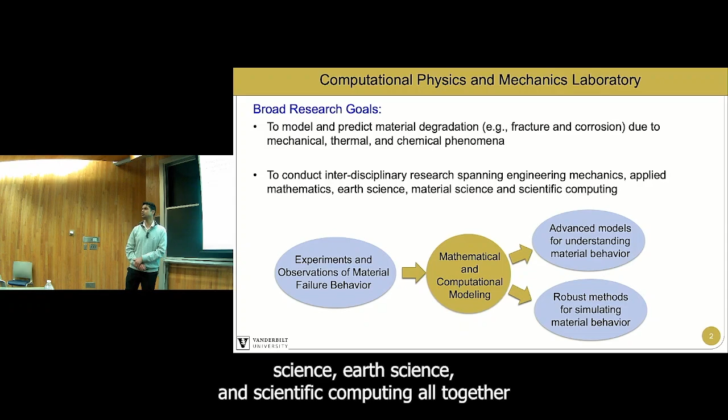Corrosion slowly became an interest in electrochemistry and electrochemical processes, which we are expanding into. It involves mechanical, thermal, and chemical phenomena, and we have to model all these together in a unified manner. That brings in interdisciplinary aspects: engineering mechanics, applied mathematics, material science, earth science, and scientific computing all together. We mainly operate in this mathematical and computational modeling space.

We work with a lot of experimentalists and observational people, and part of the reason why I go to conferences and give talks is to make more collaborations with experimentalists. So I would love to chat with some of you if you have time later. We build advanced models when we want to understand new material behavior, but we also try to develop robust methods to simulate material behavior. I'm mainly going to focus on this part in today's talk.

How do we develop better methods to do large-scale problems? I want to acknowledge all the funding agencies that, as of today, still operate. So NSF—maybe some of you got the joke—funded this through the Arctic and Antarctic Sciences Program. We are very fortunate to have received their funding, and also a career award from the Office of Polar Programs.

NASA funded us on some of the ice shelf work. Vanderbilt, the Royal Society, and the Fulbright Fellowship was from the USIEF Foundation. Last year I was here in Minnesota to visit the 3M campus because they were funding us on some of the work—I'll talk about it a little later. Very recently we received funding from the Heising-Simons Foundation to do AI-based prediction of ice sheet fracture. I want to acknowledge all the various postdocs and grad students who worked with me at Vanderbilt, and undergrads and high school students who always have the passion to learn new things, along with the several faculty and staff who helped collaborate with us on these projects.

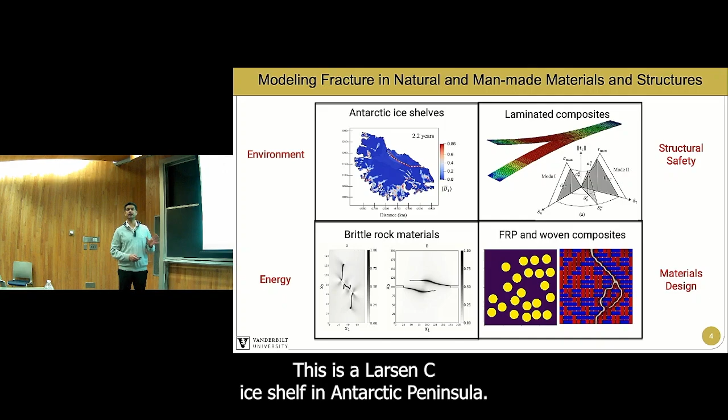So a few applications: mainly we work on Antarctic ice shelves. We use damage mechanics models to predict how icebergs calve off big Antarctic ice shelves. This is a very significant result where we were able to match the exact calving pattern found in a real ice shelf—this is the Larsen C ice shelf in the Antarctic Peninsula. We were able to match it with simple damage mechanics models, and that's where our NASA funding supported us.

We also work with delamination problems and woven composites, funded by ONR—I didn't acknowledge them earlier. And then we are also interested in brittle fracture of rocks, sometimes going towards hydraulic fracture and sometimes just simply how rocks fracture.

So a lot of our work is grounded in fracture physics or fracture mechanics. I want to focus on a part of this, computational fracture mechanics, and how that field evolved. I won't be mentioning all the contributions by all the people in fracture mechanics, so please bear with me with the limited references.

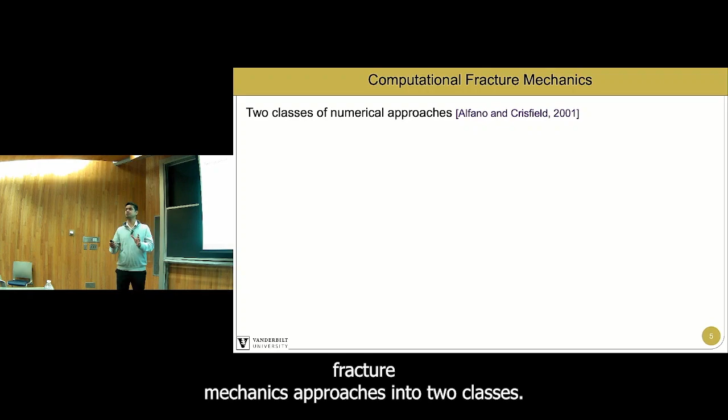One of the first papers I read as a student was Alfano and Crisfield's paper, where they classify all computational fracture mechanics approaches into two classes. One is the linear elastic fracture mechanics approach.

The first methods were done by a few people at NASA, and then Irwin, Rybicki, Raju, and others, maybe through the Naval Research Lab, started working on the virtual crack closure technique. They used a numerical way of calculating stress intensity factor, then used that to propagate cracks.

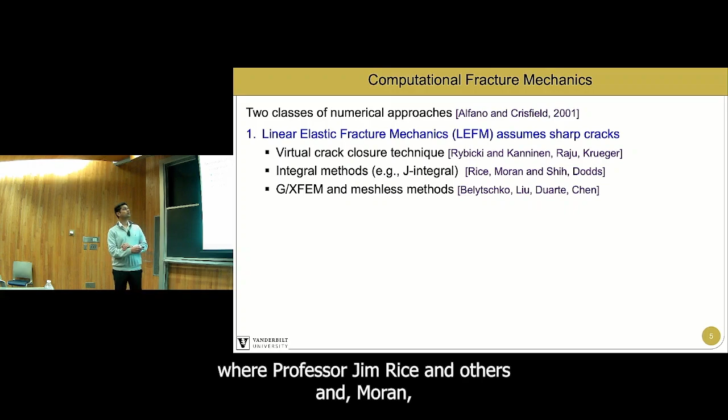In finite element method, then came the integral methods, where Professor Jim Rice and others, and Moran, who was my PhD advisor at Northwestern, and Bob Dodds at Illinois, all started working with J-integral methods. That's incorporated into Abaqus, for example. If you do any fracture propagation, you'd probably use a J-integral.

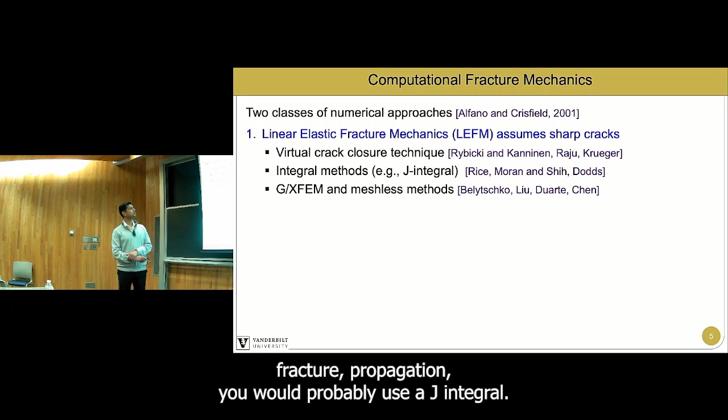And then came meshless methods, XFEM. Professor Belytschko, who taught me finite elements at Northwestern, coined the term XFEM. Professor Wing Kam Liu did a lot of work on meshless methods, again at Northwestern. Professor J.S. Chen and Armando Duarte at Illinois improved GFEM, XFEM. And honestly, GFEM and XFEM come from partition of unity methods.

A lot of folks like Babuska, who I met when I was a postdoc at UT Austin, and many others contributed to the early foundations of it.

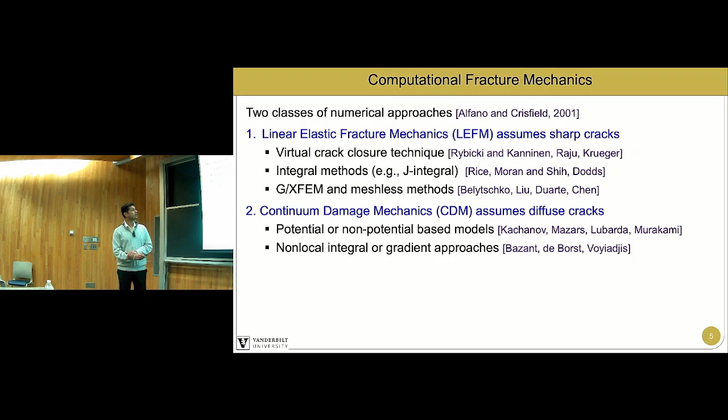Then there are continuum damage mechanics methods, which is the other class. The difference from LEFM is that it assumes cracks are sharp, while continuum damage mechanics assumes the cracks are diffused. Also, it's not modeling just one crack sometimes, it's modeling a collection of cracks.

So there's one way of interpreting continuum damage mechanics as one crack, but thought of as a diffused crack. The other way is thinking there are many small cracks, modeled as one diffused damage zone. So when Kachanov and Mazars formulated their original damage mechanics models, they thought materials don't fracture with one crack, they have multiple cracks before a macro crack forms, so you should model them as damage zones.

And then came the non-local gradient-based approaches, because local damage approaches that Kachanov and Murakami proposed did not satisfy thermodynamic requirements when modeling. So Professor Bazant, who's Jialiang's advisor and also my teacher at Northwestern, came up with non-local integral approaches to account for the need to make it thermodynamically consistent.

And then de Borst and Professor George Voyiadjis and others contributed to gradient-based approaches. Then there were whole different cohesive zone models. I won't go into the details of it. Several researchers contributed to it in the past. They assume zero thickness cracks, but they have a length scale, so it still falls into continuum damage mechanics.

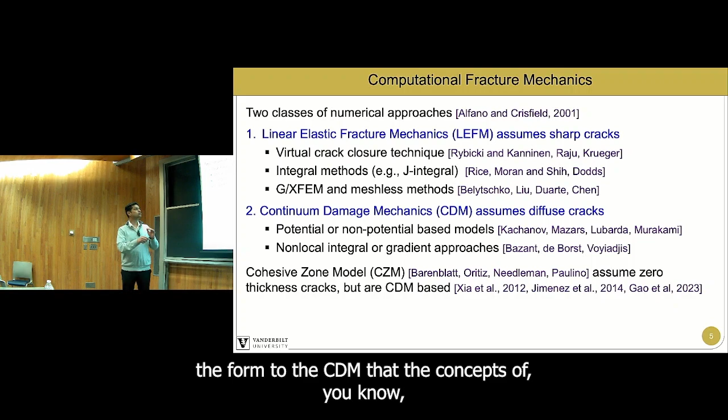Cohesive zone models connect in some way the LEFM to the CDM, with concepts of strain energy release rate and so forth. But as Alfano and Crisfield argue, it's still a CDM-based method. Some people may disagree on that, but we can chat.

So now this phase field method comes along. It's been proposed by Francfort and Marigo, and then Blaise Bourdin, and several other researchers did early work. Really in 2010, when Christian Miehe started to work on these and framing them, that's when the community started adopting this in computational fracture mechanics.

And there are still arguments to be made: is it a non-local damage type approach, or some sort of diffused fracture mechanics approach? I won't go into the debate today in the interest of time, but I'm going to think of this as a non-local damage approach in the way I present it.

And other methods like peridynamics, crack band method, discrete and particle methods, they all exist. They're useful in many ways, but I won't go into that in the interest of time. So that's sort of the history of computational fracture mechanics.

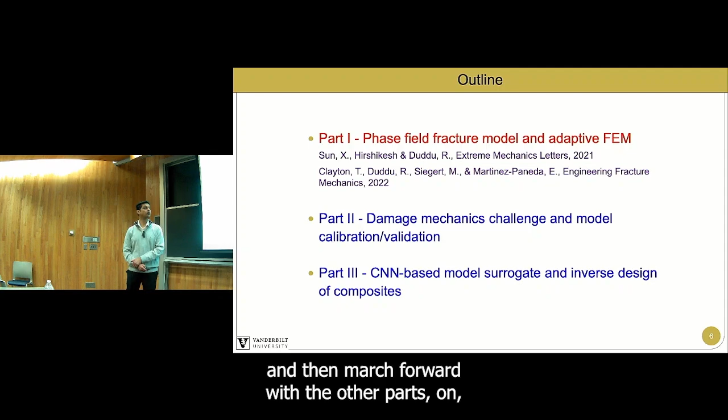The outline of my talk is just presenting a few of my recent work. Part one, I'll try to quickly present what we did in these two papers, and then march forward with the other parts on experimental calibration and also how to apply machine learning in this context.

So our phase field fracture modeling was motivated by these huge fractures that appear on Antarctic ice shelves. In the glaciology community, they classify these fractures as crevasses and rifts.

So when you go to a glacier, this glacier is about maybe 100 meters in height. That's huge, right? Multiply by 3 if you're American, that gives you feet. So it's 300 feet, vertical fractures that go almost more than half their thickness.

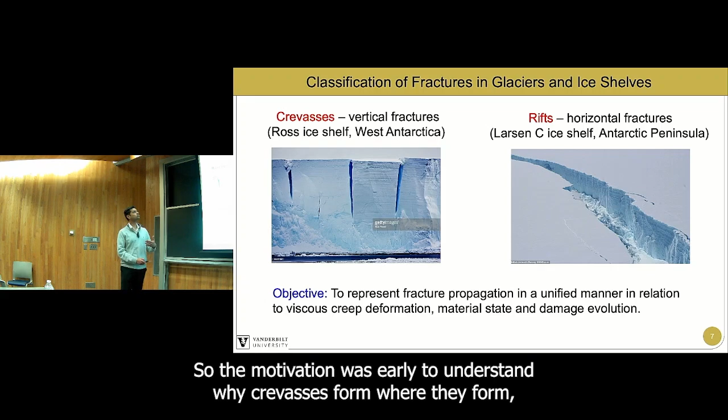That means these are fractures that are about 50 meters, 100 meters deep. The original motivation for studying these fractures is that if a field expert was doing something, they could fall in. In fact, one of our glaciologists, a very famous field glaciologist, passed away 2 years ago falling in a 10-meter or 20-meter crevasse, and it's very hard to detect them. So the motivation early on was to understand why crevasses form, where they form, so that we can make field exploration a little bit safer.

Then climate change starts to take off. We have these crevasses going full depth and then forming these huge rifts, which are hundreds of kilometers long, and then you have icebergs coming out of Antarctica that are the size of the state of Delaware. Nobody has probably been to Delaware, I've never been, so we don't know — so it's the entire metro area of London, if that's a better estimate for you.

So these huge rifts are formed by these crevasses. Till now, there are no models in the glaciology world where you can take a fracture initiation problem, go to crevasses, and from crevasses go to rifts, and do a whole 3D fracture representation in a unified manner. So in 2010, as a postdoc, I started on that problem, and for 13 years I've been solving this, and finally we have made some headway. So these are challenging problems.

That's because there is creep deformation, material state and damage evolution, thermomechanics, all involved in this. So the phase field model presents a unique opportunity to model these processes because it's very compatible with the finite element method, and it's thermodynamically based on Griffith's theory of fracture, which goes back all the way to 1921. It naturally evolves fractures through initiation and propagation in 2D and 3D, giving us a holistic way of understanding these processes.

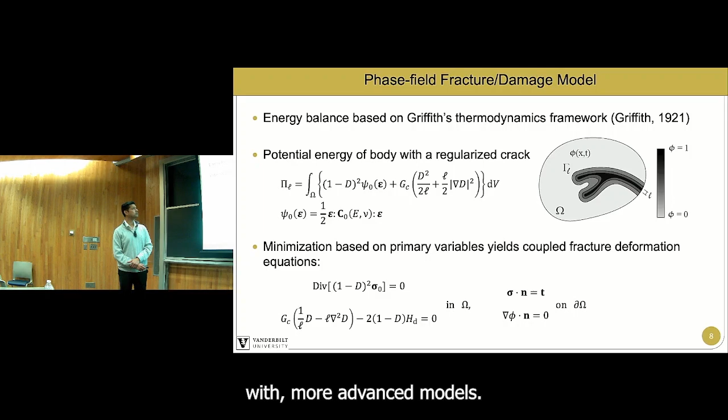There are many more interpretations of this with more advanced models, but this is the basic model that we'll operate with. So we take that same phase field evolution equation, and we can add some viscous regularization for avoiding certain numerical issues. That is how we started in our first paper in 2021 during COVID, and we published it in 2021.

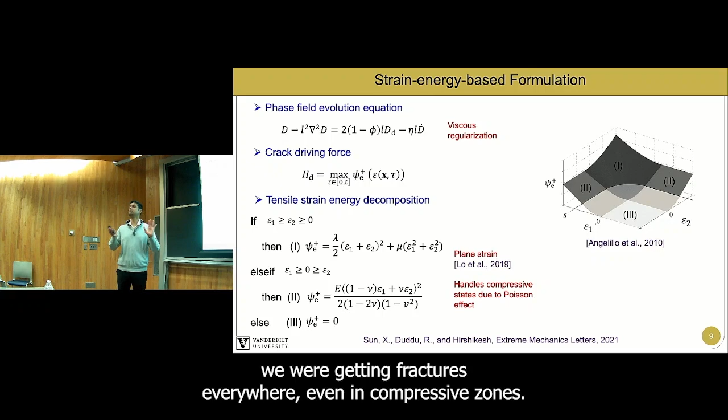We started with the crack driving force as the positive part of the strain energy. The understanding here was that when cracks grow, they grow in tension, not in compression — brittle fracture. But when we started with only that, we were getting fractures everywhere, even in compressive zones, even though we said this positive part is only based on the positive eigenvalues of the strain. So we dug deeper into it.

We looked at Chad Landis and his students' paper, Yusheng Lo, and they pointed this out a few years ago in 2019: if you take the strain energy function like this, which is based on two positive strains, then you are only modeling the region where the strain energy is rapidly growing with the strains.

But in plane strain systems, you can have one strain positive and one strain negative. So you can have tension in one direction but compression in the other direction due to the Poisson effect. And when that happens, if you don't correct this strain energy to a different form, then you're overestimating the strain energy and over-predicting the fracture.

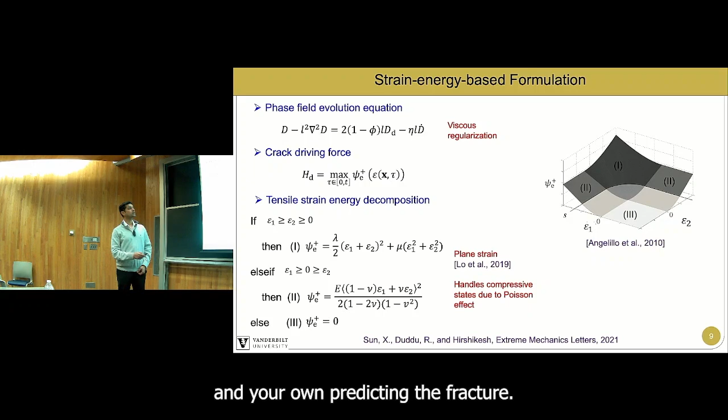So you need to model regions based on this, when one strain is positive but the other is negative. Let's say this strain is negative but this strain is positive, and in that region it has a different slope. Then in regions where both strains are negative, the strain energy has to be zero. That means it cannot propagate in compression.

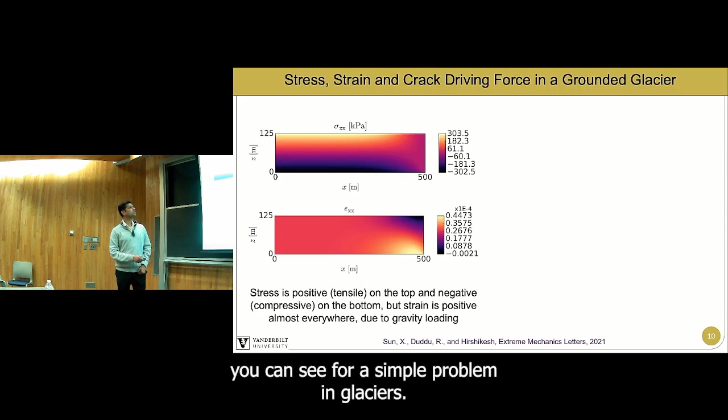So when we apply this model, you can see for a simple glacier problem, and I'll come to the boundary conditions a little later, the stress, sort of like bending, goes from tension in the top regions to compression in the bottom regions. If you take the standard Miehe model, you get positive strain energy everywhere, meaning all the fractures grow everywhere.

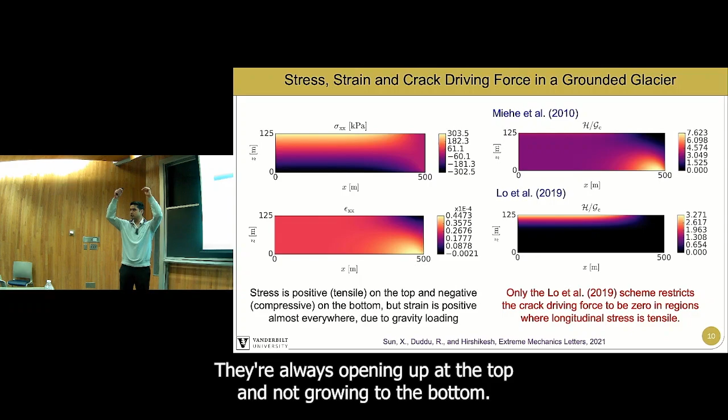But if you take this Yu-Sheng-Lo model, the fractures only grow in the top regions. As I showed you the picture of crevasses, they only grow at the top, always opening up there and growing downward. So only the Lo model seems to explain this based on the understanding of the problem, and it also matches field observations. This was our main contribution in that first paper.

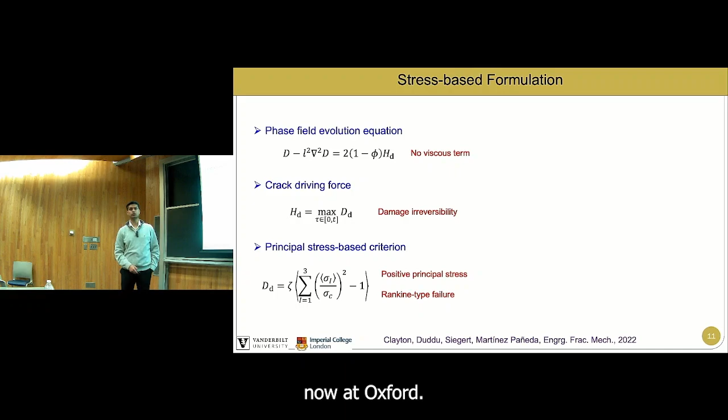Then I connected with one of my collaborators, Emilio Martínez-Pañeda, now at Oxford. We started working with his student and said, if fractures are driven by positive stress regions, then why go through all the strain energy-based models? Why don't we go to stress-based models? So then we simplified this phase field model.

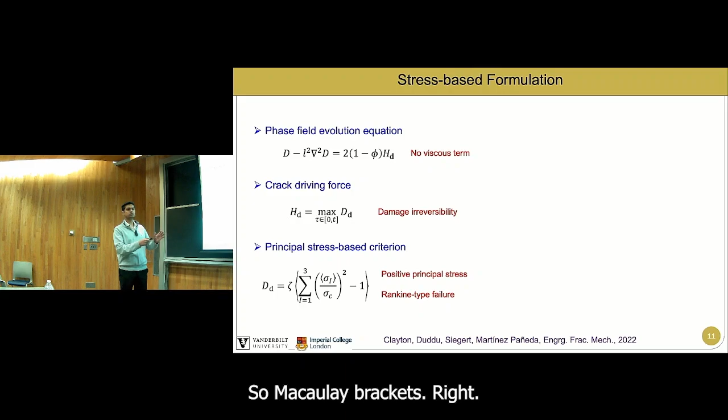We got rid of the viscous term. Then for the crack driving force, instead of defining it based on strain energy, we now write it in terms of the positive principal stresses. Sigma I are the principal stresses, and anytime it's positive, using Macaulay brackets, then we add it into the crack driving force. We apply a threshold for crack growth, and then you get this formulation.

And this surprisingly also works for incompressibility. If you're doing soft materials, it works good as opposed to the regular model. If you're doing brittle, tension-compression asymmetric materials, it works better. We have also been able to adopt it into hydrofracture type settings.

So how do our results look? This is a paper that we wrote in Engineering Fracture Mechanics 2022. We take this glacier problem. We have a small crack at the top.

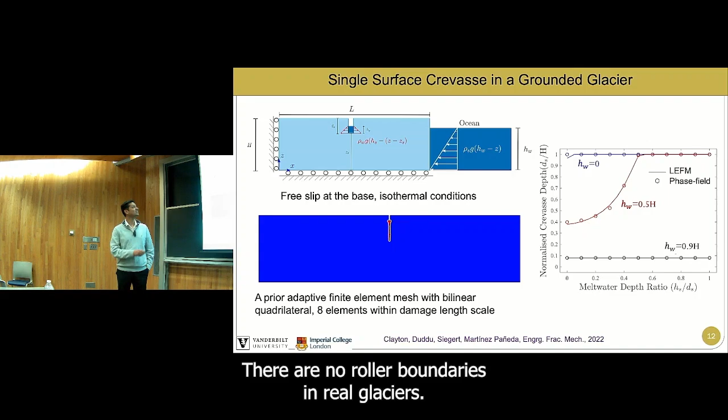So you have ocean pressure on the right-hand side trying to stabilize the crack process here. And as you can see, the cracks start from this notch and they propagate, then grow and stop. As soon as it goes into the compression region, it stops because there's no longer any driving force.

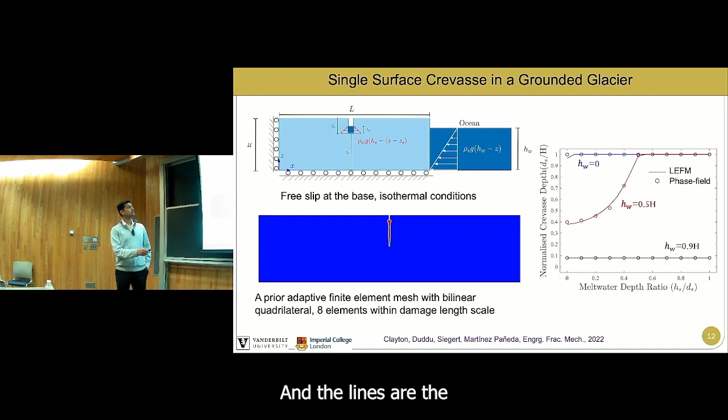And then we derived a linear elastic fracture mechanics solution. In the appendix of this paper you can find the whole derivation. The lines are the linear elastic fracture mechanics analytical solution, and these little round circles are one simulation each in phase field.

So what we do is choose a certain level of water in the cracks and a certain height of ocean water. We have three ocean water heights, several different meltwater heights in the crack, and we're doing a parametric study. At every point our phase field model agrees with linear elastic fracture mechanics, so this sort of verifies that we are doing good.

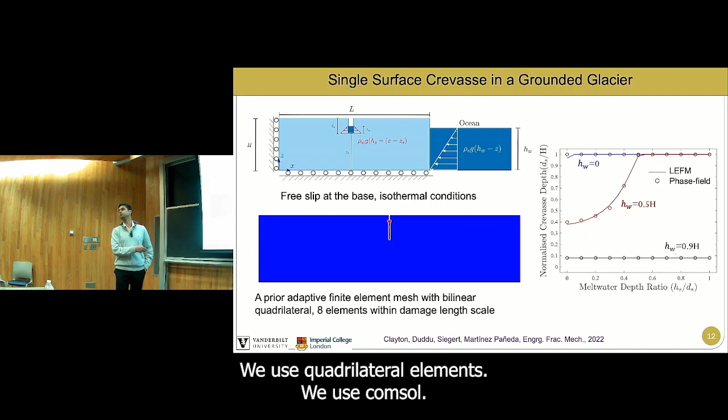So for this, we do some sort of adaptive finite element method. We use quadrilateral elements, we use COMSOL in this case. We can also do multiple cracks.

And for multiple cracks, we can again get the corresponding LEFM solution, because when there are multiple cracks together there is crack shielding, so the stress intensity factor is actually lessened. You get smaller crevasse depths, and when we compare that with phase field, we get good matching even in that case.

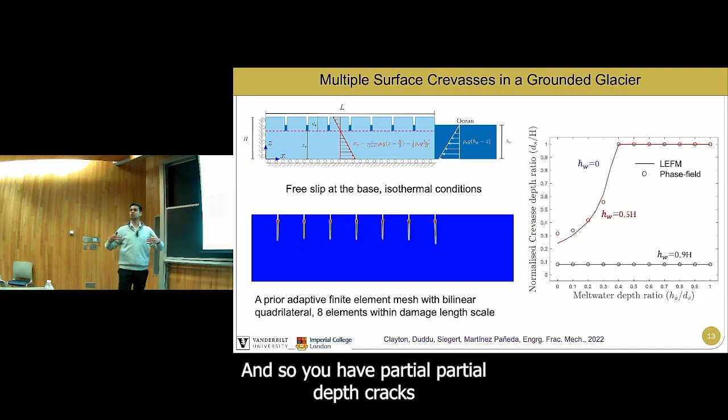In real glaciers, as you saw in that picture, there are cracks at regular periodic intervals. That's because there's always some driving stress where once a crack goes deep enough, it's no longer favorable to grow there, it becomes favorable to grow elsewhere. So you have partial depth cracks growing in this nice periodic fashion.

And then we started trying to do the 3D problem. As I said, there's no model that exists where we can go from 2D to 3D and understand iceberg calving, where the rifts fully form and separate icebergs. So we considered a simple problem.

We took a rectangular shaped 3D glacier. We put the same ocean boundary condition. We took 2 cracks on each side, and we put the ocean water height as half the ice depth. And hopefully the movie will run again.

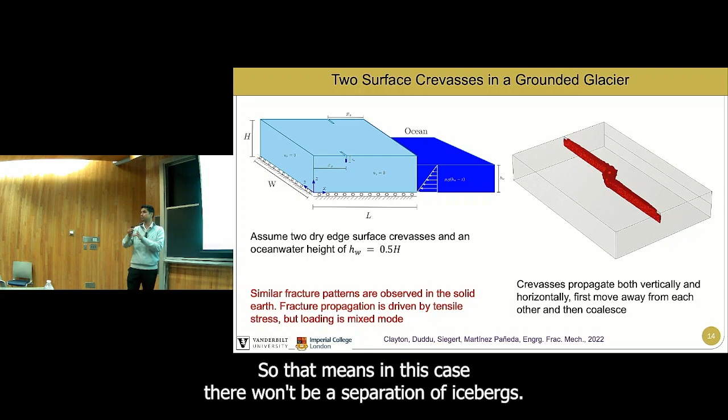So we saw that crevasses immediately form, they go below, and then they start propagating in plane. And then they start connecting, and they form huge rifts. But because there is the ocean pressure, they don't go all the way down, so that means in this case, there won't be a separation of icebergs.

They'll propagate, and they'll just stay dormant. But once you put a lot of hydrofracture, a lot of water into those cracks, then they start propagating, and then you get full fracture. So what we found out through this work is hydrofracture is an essential component of these iceberg calving processes. If you don't consider that, you don't get it.

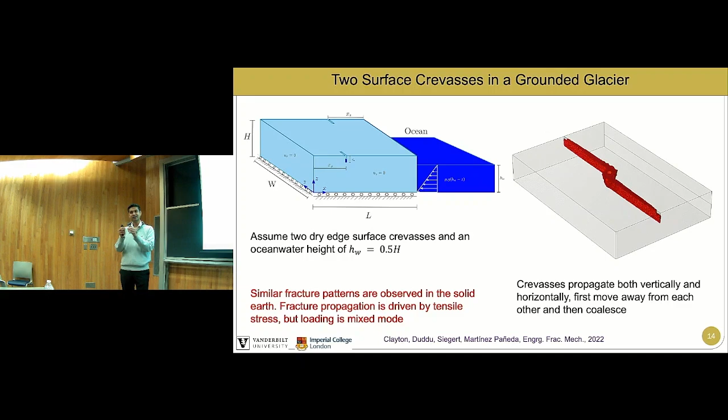And it's not hydrofracture like how we do it in oil and natural gas exploration. It's not dynamic, it's not turbulent fluid flow. It's just slow water-based fracture that happens because water has a higher density than ice. So it applies a little bit of pressure, more than the closing ice pressure, enough to slowly propagate this crack over time. So all those critical insights can be obtained through modeling.

So this is where we hit a hurdle. This simulation, as simple as it looks, ran for 7 days in COMSOL with 4 cores or something in parallel on the computer at Imperial College. We couldn't run many simulations like this. So then we said we need efficient methods.

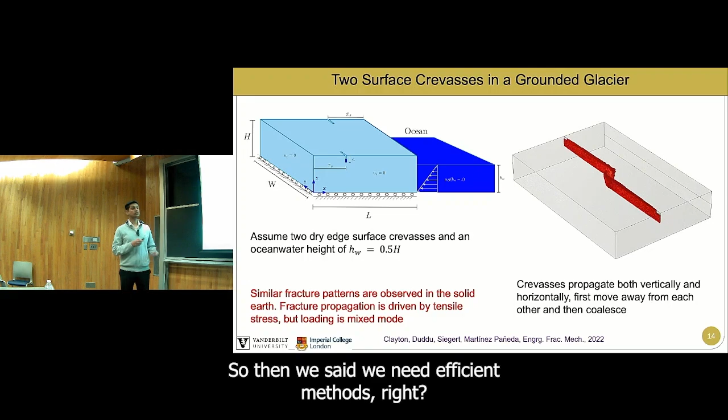So then we started exploring with some collaborators at Durham University. This is through the Royal Society's International Exchanges Award. We started looking into discontinuous Galerkin methods. How many of you have studied finite elements? In finite elements, you use continuous Galerkin, the Lagrange shape functions and all those, but you can also try to make them discontinuous.

And when you do that, you make mesh refinement very easy. Each element has its own support. You can just partition the mesh elements. You can have hanging nodes, no problem. But you enforce continuity using weak form implementations. I won't go into too much detail, but when you do that, you get very nice adaptivity with hanging nodes.

You can use polynomial refinement, mesh refinement, mesh size refinement. You can parallelize them. But it's also complex algorithmically, and it's computationally costly.

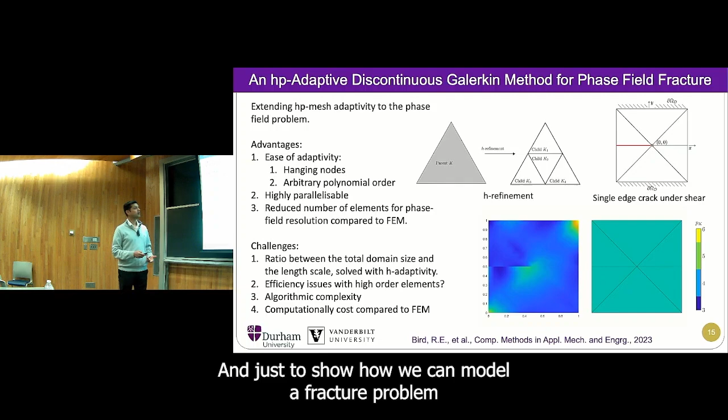And just to show how we can model a fracture problem, as the fracture is going, you can adaptively refine the elements only in the region where the cracks are growing, in both polynomial order and also mesh size. In fact, in this case, we use 6th order polynomials in certain regions to reduce the mesh size. So you can get efficiency if you do it right.

So that was a paper we wrote in CMAME, and Robert Bird, who's a postdoc at Durham, led this work. I was not leading this work, but collaborating.

On the other hand, we were leading at Vanderbilt on adaptive methods in FEniCS, which is the open source finite element software. There, we wrote a few papers in the last few years from 2022, with my postdoc Abhinav Gupta and my grad student Nguyen. And this is how it works.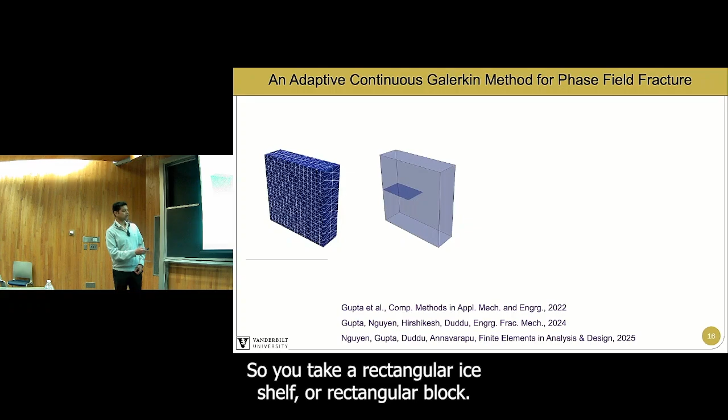So you take a rectangular ice shelf or rectangular block, doesn't matter, and you start propagating a fracture. You only refine it in the region where it is the crack tip, and then you propagate. You didn't refine anything in the far field, so you're introducing degrees of freedom only where it's necessary. And you get a very nice fracture path because it's mode 1, the easiest problem to solve in fracture mechanics.

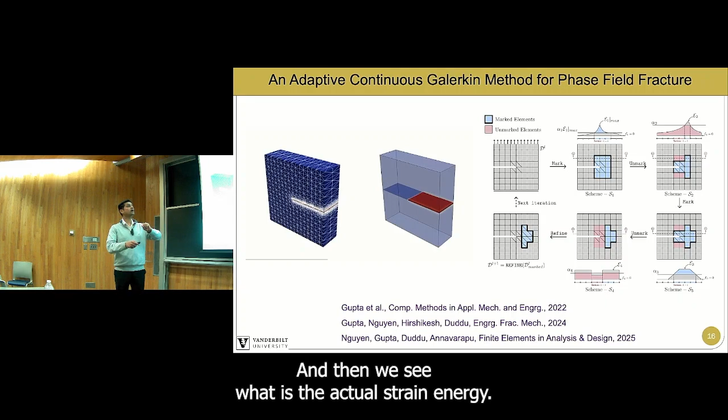But we do that in this 4-step stage of refinement. We first take the crack tip, we look at the strain energy increment from one time step to another. We then mark that high strain rate increment for refinement, and then we see what is the actual strain energy. If it's not so high, then we unmark, and then we look at the damage variable, and we say if the gradients of the damage variable are very high, you again mark them for refinement. And then if you hit a certain level of refinement, we don't want to over-refine and make it too computationally expensive, so you again unmark them.

So we go through this 4-step process, we get a very optimized mesh, and that's how we drive this crack tip refinement.

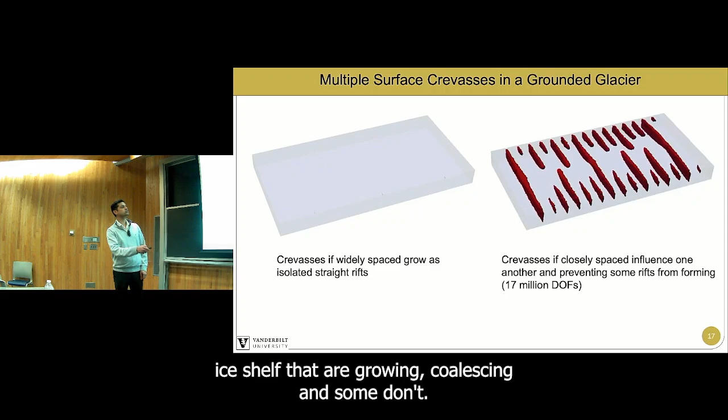And so now we are able to solve real crevasse problems in 3D, and so we can solve scenarios where there are multiple cracks in a 3D ice shelf that are growing, coalescing, and some don't. You get real crevasse fields that look like crevasses in the field.

And we solved this for 17 million degrees of freedom on just 40 cores. This ran for less than 5 hours. So we are able to deploy it in parallel.

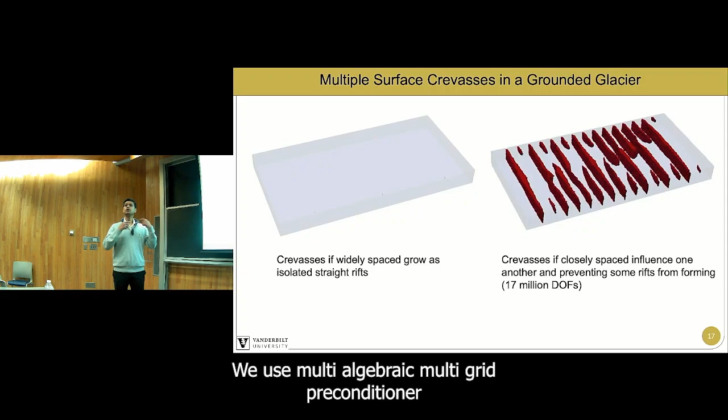We are able to scale it to multiple processors. We use algebraic multi-grid preconditioners and iterative solvers in PETSc to then drive the efficiency in cracks.

We can also do isolated crevasses, and then they grow like these individual rifts. They go all the way. But when you have multiple crevasses close by, some will get shielded, so not all crevasses will propagate.

So we can understand these sorts of settings, and we can make hypotheses. The hypothesis we made is that there is some sort of connection between the geometric and material properties of ice.

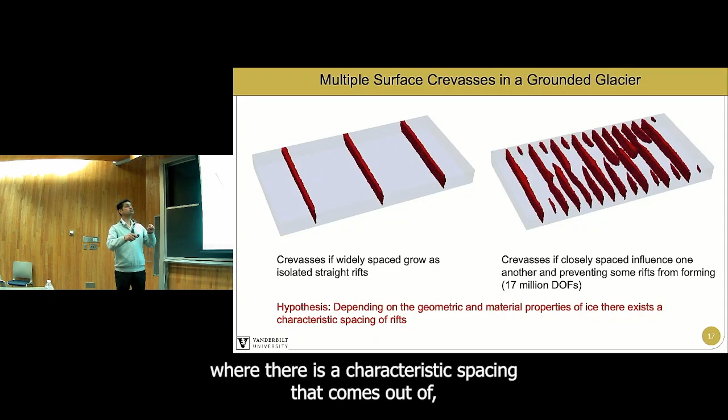There is a characteristic spacing that comes out of this competition between the driving stress and the material strength, and that's what we want to find out next and match it with field observations.

So that's part 1. And then I'll try to skip a lot of the experimental calibration aspects quickly in the interest of time.

So Purdue came up with a damage mechanics challenge. They did 3-point bend experiments on 3D printed rock because they can - they have fancy equipment. They took gypsum and 3D printed rock.

They also did DIC. They also did X-ray tomography to get fracture surfaces and all. So it's a very, very extensive data set.

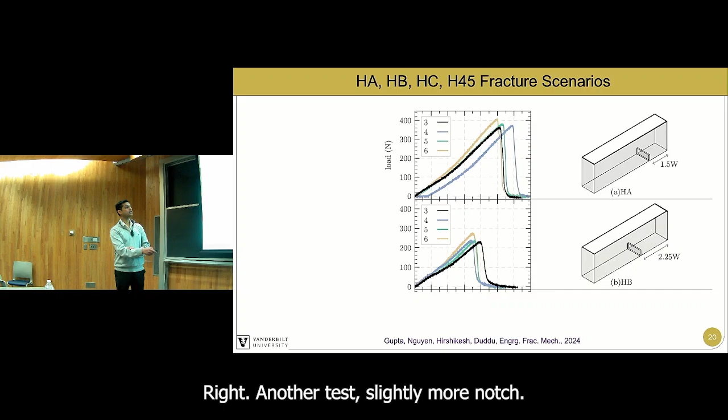There was one experiment that didn't go well, so they asked us to disregard it. So they did 4, but 1 they threw away. Same thing for another test, slightly moved notch, and then another one where they put the notch at an inclined angle.

And another one, they put it right under the load, like a standard 3-point bend experiment.

In all cases, we got the load displacement diagrams. And they said, what method can do a better job at predicting this?

We started with the phase field fracture model with just 2 parameters. We wanted to calibrate the fracture strength, and we wanted to calibrate the cohesive strength or length scale.

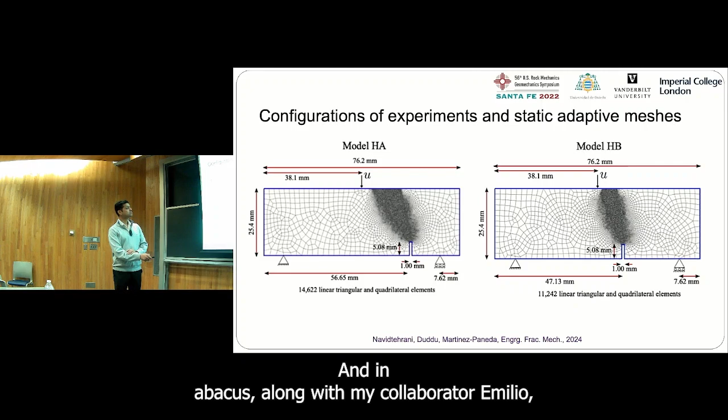They're dependent. In Abaqus, along with my collaborator Emilio, we started developing regular Abaqus type meshes where you put the notch, you expect where the crack will propagate, and you refine.

But this is cumbersome. You have to manually refine it, and then you have to put more degrees of freedom than are probably necessary to model this problem. So you have 14,000, 11,000 elements in this.

In the 3D case, you go to 2 million tetrahedral elements, which is a lot.

And this one again takes long, because it's Abaqus, it's not very well parallelized. It's a code that a student wrote - you know all about those. And I wrote some very bad codes when I was at Northwestern.

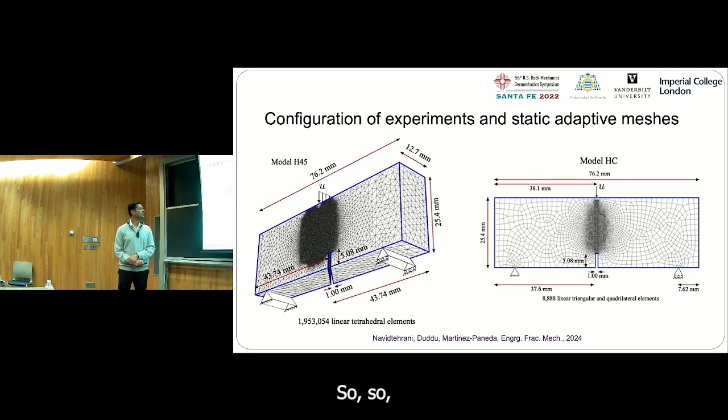Scalability is not our motivation. Our motivation is to get some results and get a paper. So 2 million elements - this ran for multiple days.

Whereas on our end, we have another paper with my postdoc where we started doing this adaptivity test, and this is how our method works. It only refines wherever it's required - where the supports are, where the stress concentrations are, and where the fractures are.

And it also works in 3D. This is all FEniCS, by the way. FEniCS has automatic mesh refinement within it, so within a few lines of code, you can actually have adaptive 3D meshing in both 2D and 3D.

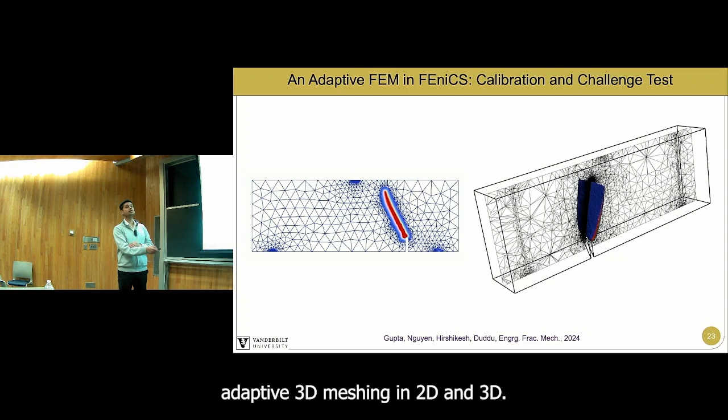And so we got these fracture patterns at a fraction of the cost. If you compare the 2 simulations in 2D, this is our adaptive simulation.

This is our non-adaptive type, like standard, where you manually refine it. And what you see is that you're able to get from 3,200 seconds to 700 seconds - a 1/4 reduction in computational cost.

And you're able to run this more efficiently with a smaller mesh size, and you get the same crack pattern.

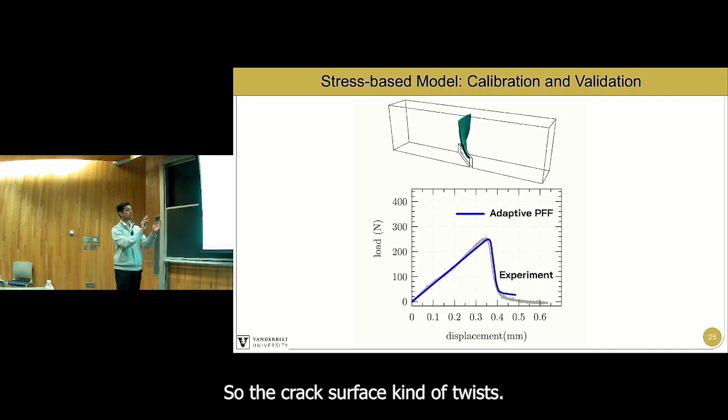So then we did the validation on other experiments, and we were able to get the load displacement curve matching experiments and the crack path matching. Even in 3D, we can get the load displacement curve, and even the twisted crack pattern. There's a bit of mode 2 and mode 3 in this case because of the twist of the inclined crack, so the crack surface kind of twists. We were able to capture that very nicely with adaptive refinement.

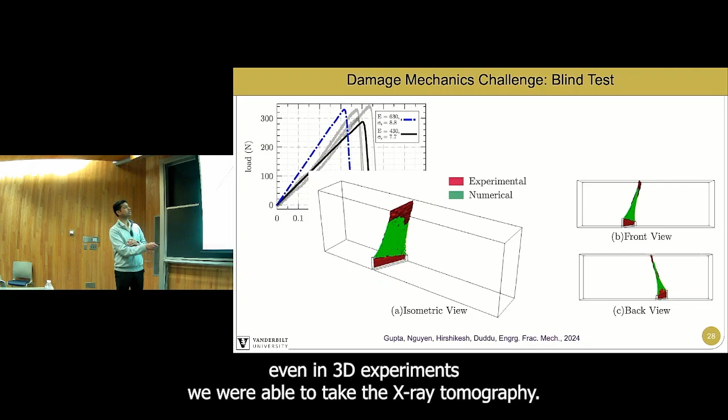We did all 4 different experiments and were able to get good matching. The blue and the black are bounds. If we changed the Young's modulus from one to another, we can do an upper bound and a lower bound calibration, because experiments always have variability, correct? So in all cases, even in 3D experiments, we took the X-ray tomography and matched the experimental crack path with the numerical crack path, and we showed all views, right?

So very good matching with just 2 fracture parameters. And so that's when we said the damage mechanics challenge with phase field is a good option if it is a brittle material, right? There are other materials which are not.

Okay, I'm almost close to my time, so if I may take just 5 minutes and explain how we are doing CNNs with damage mechanics and phase field especially. These are the 2 papers which have all the details, by my PhD student who graduated recently.

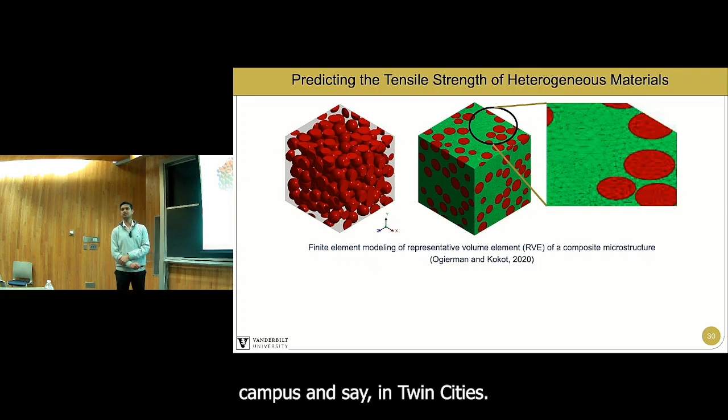Our motivation was—and this was funded by 3M—I mean, last year I came here to give the same talk at the 3M campus in Twin Cities. So we have all these particulate composites. If we want to do finite element modeling, then you have to have very refined meshes to do fracture propagation with these microstructures.

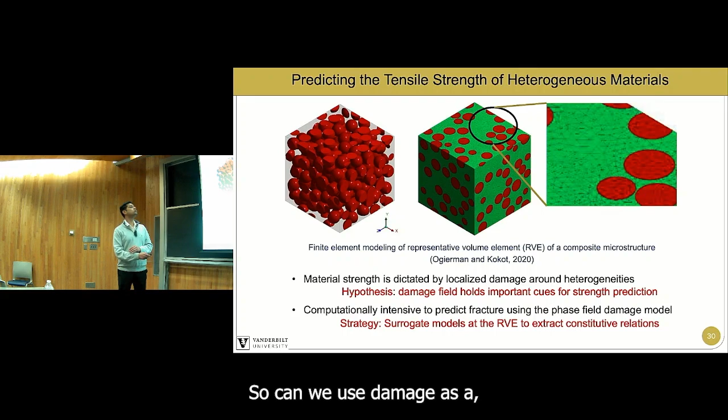So it's very hard. And even with phase field damage and adaptive methods, it's still computationally intensive. So our strategy is: can we do some sort of surrogate models to extract this as a constitutive law? And if you just did data-driven only, then you'll have problems with ML. So can we use damage as physics information in this training process, right?

So we generated a lot of data, using our FEniCS software to generate lots and lots of data. Always remember that some of the CNN models you use are very data hungry—that means you need the data. Experiments always won't give you that much rich data, so you still need your FEM, right? So we cannot just throw away all the past FEM and fracture mechanics.

So we generated, for each case, 1,000 data points using FEM with very fine meshes. We used our FEniCS adaptive codes for it. We extracted peak loads, images of damage, images of stress, and you get this information right at the point where it's peak load.

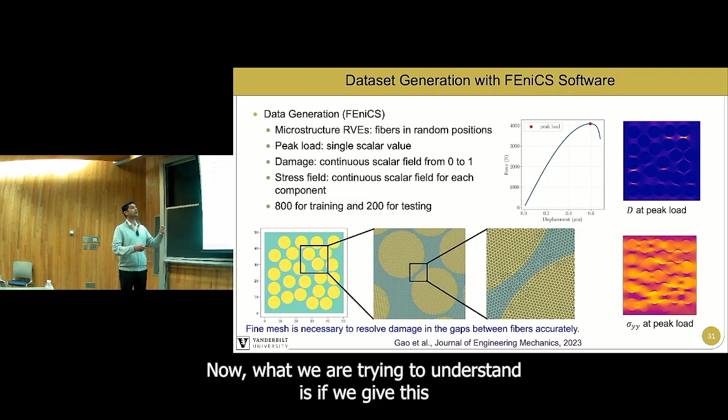Now what we're trying to understand is, if we gave this information to the machine learning model, can it predict the peak load with much better accuracy than if it did not, right? So instead of going from microstructure directly to peak load with a black box machine learning model, we're saying let's do microstructure to damage and damage to peak load, or microstructure to stress and stress to peak load.

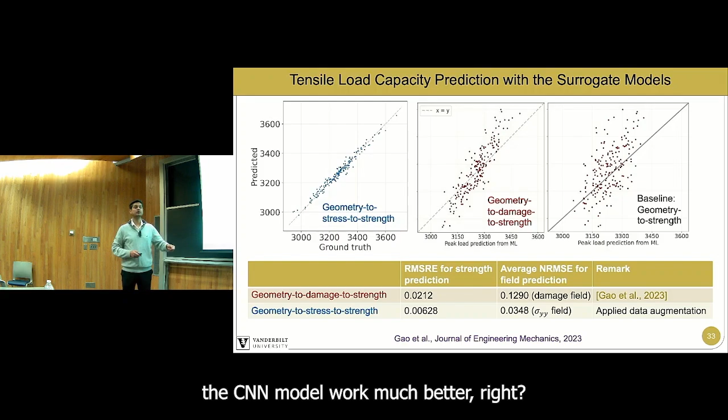So that was our paper in 2023 in the Journal of Engineering Mechanics. What we see is that if you start with the baseline, where you go from geometry directly to peak load, you get a lot of scatter—the model is not very predictive. But if you inform it with stress, you get very good matching on the test data. If you inform it with damage, it's better than before, but stress information seems to make the CNN model work much better. If you look at the errors, you're getting 0.6% error with this. So we were pretty happy with this.

And then we said, can we use this for something more design-oriented? So what is design, right? Design is always an inverse problem. You want a certain strength to be achieved, but for that you need to pick how your microstructure or structure should look. So you take the strength information, backpropagate the gradients, and try to optimize the microstructure for the strength.

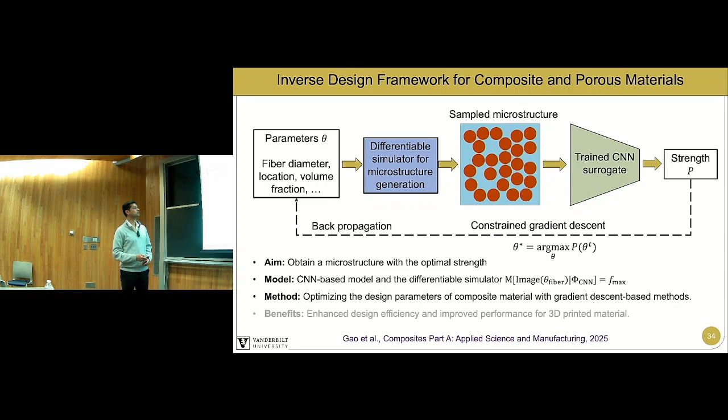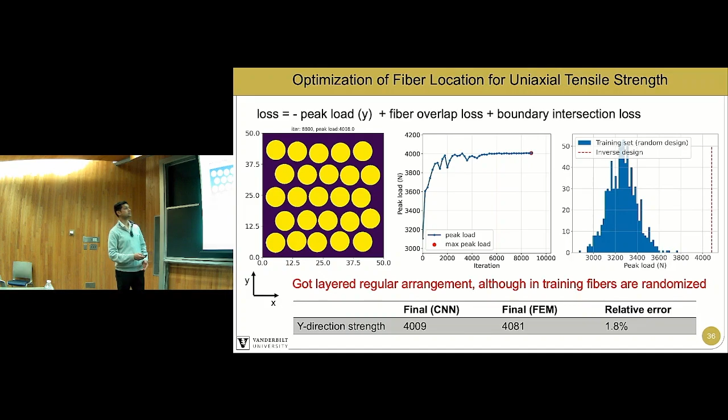I'll skip the details of all the math, but this is how our optimization works. We start with some low initialized value, and then we optimize using the machine learning model. The peak load is increasing—we went from 3,000 to 4,000, and it converges, and you get this sort of structure that comes out of this training process. Then we check that strength with FEM to confirm it's correct. Then we initialize with other kinds of strengths, and we get different types of structures, right?

I'm skipping a lot of details here just to give you a flavor. Eventually what we found out is that different conditions lead to different types of fiber arrangements in microstructure. So the diamond fiber comes when you are optimizing for strength in both directions. And so with that, I'll conclude.

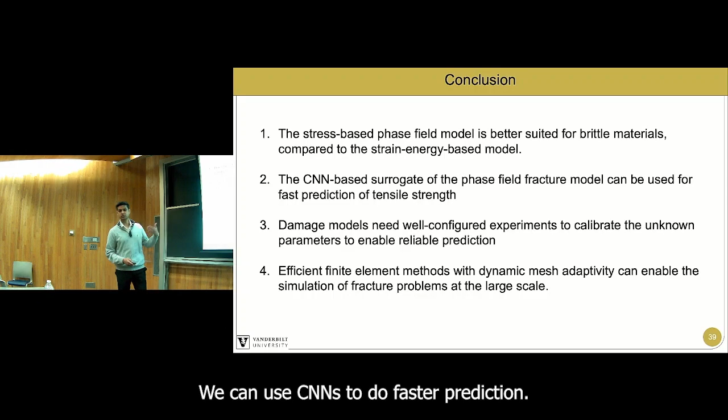Sorry if I went over a little bit of time. So we have these phase field stress-based models that work well for brittle materials. We can use CNNs to do faster prediction. And any phase field model, you have to configure it well with experiments and get the parameters right to make good predictions. And then of all this, efficient methods are necessary to solve real problems at large scale. So if you walk out of this with just one takeaway, that you still need efficient finite element methods to do the problems right. Okay? So thank you for your attention, and happy to take questions.

All right, thank you. Any questions? Yes, Michael. Thank you for your talk.

My question is about your part one. How do you consider the temperature change? Or when you are simulating, do you also consider some part of ice melting in your crevices?

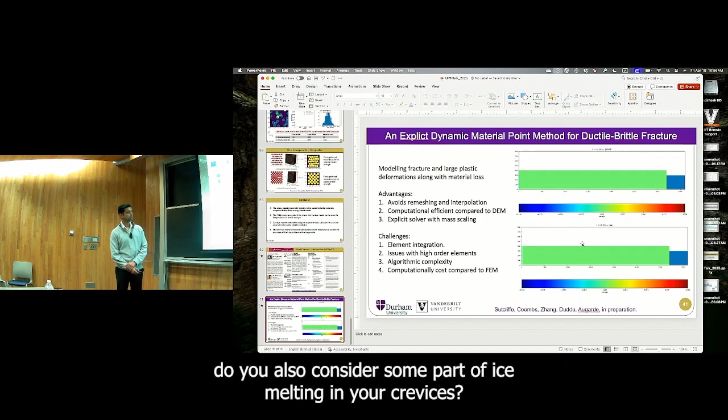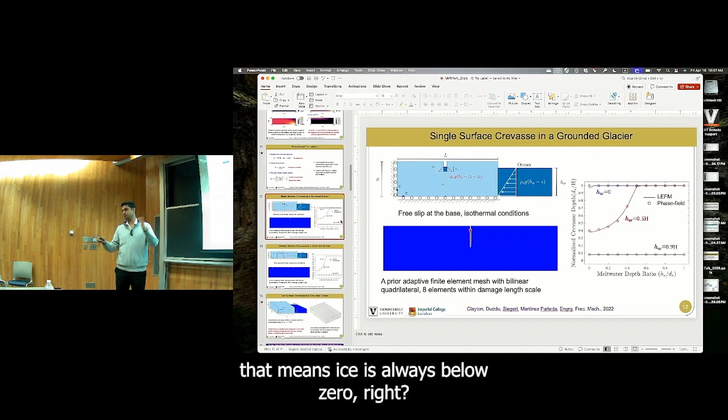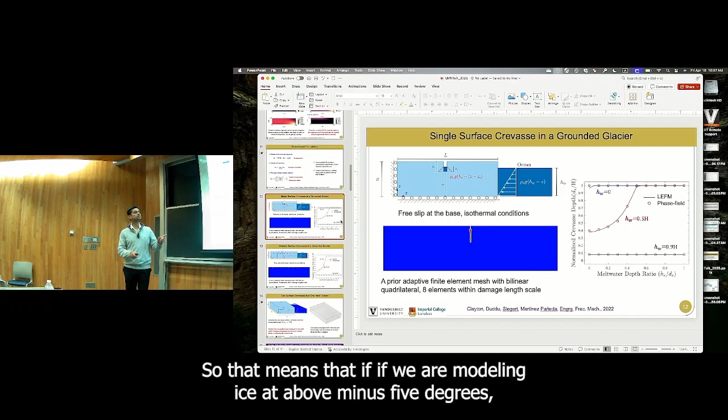Yeah, so in these cases, it's a fictitious case. We have hydrofracture here, but we don't have any thermal effects. So it's just the pressure that the water applies in the fracture that causes it to propagate. In a different paper, we add melting to it, and we realize that if the ice is less than minus 5 degrees, so ice is always below zero, the water will actually freeze in the crack and it will heal. But if it's above that temperature, the melting is not strong enough to propagate the cracks, but the freezing is not strong enough to stop it, so you still get cracks. So that means if we are modeling ice at above minus 5 degrees, you can ignore thermal effects and only model the hydraulic effects.

Yeah, very great question. Yeah.

Thank you, I want to follow this question. Just a general question for the phase field model, how do you generally consider the thermal effect and the viscosity effect into the phase field model, because you need to formulate the potential functional. The second question is regarding the adaptivity. I want to know what kind of criterion you will use. Is it specific to the fracture problem you are looking at?

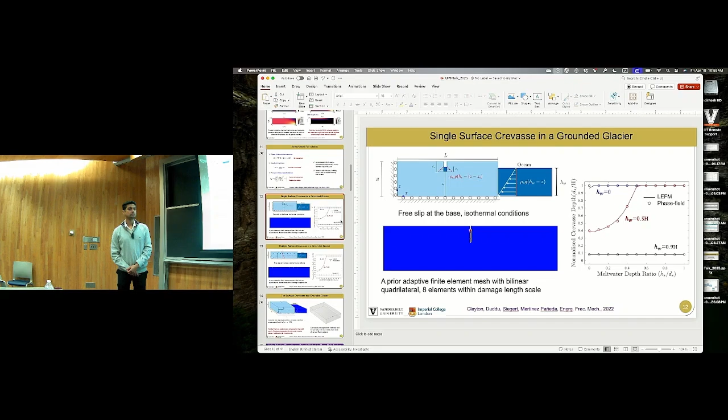Okay, I'll come back to your second question. I have some clarification to ask. So going back to thermal and viscous, how do you incorporate them?

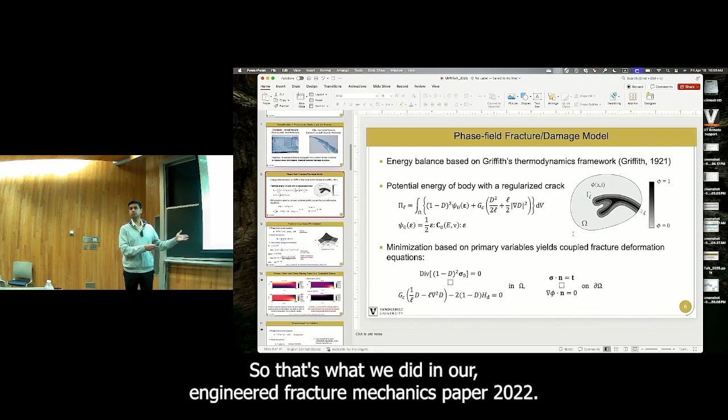I don't have the equations in this slide, but the way we model that is, you have this potential energy, and here I only incorporated the standard linear elastic energy. But you can say that this is not the full strain, but only the elastic part of the strain. And you can assume small deformations but large rotations, and still formulate it as an additive decomposition. So the total strain equals the elastic strain plus the viscous strain. Only the elastic strains contribute to the strain energy. The viscous strains don't contribute to the opening of the fracture, they go into a different, separate dissipation process. So when you do that, you can incorporate viscous effects in some way. That's what we did in our Engineering Fracture Mechanics paper, 2022, where we did this additive split.

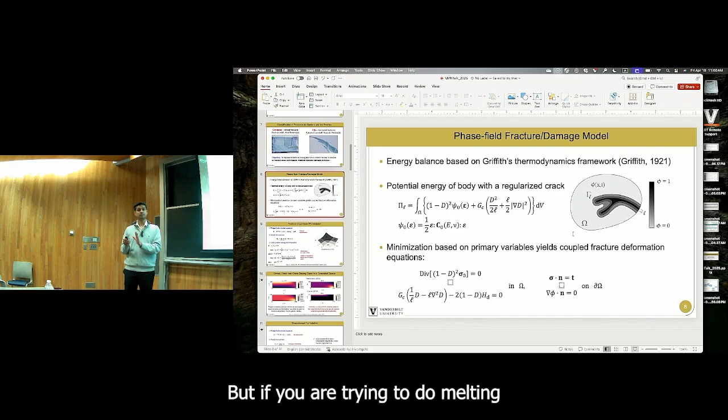Then thermal effects can also be done in a similar way. The only way we incorporate thermal effects is we have a thermal strain, so alpha, which is the linear coefficient of thermal expansion, you can incorporate, and then you get thermomechanical type stresses. But if you're trying to do melting, then you have to do more kinematics.

So what you're saying is, let's say you have a crack, the crack opening is not just related to the stress, it's also related to the amount of melting. So the crack separation, if you look at it in a cohesive zone modeling setting, has two components: one has the elastic opening, and one has the melting-based opening. You have to subtract those and take care of it. So it can be framed into this phase field fracture approach and done that.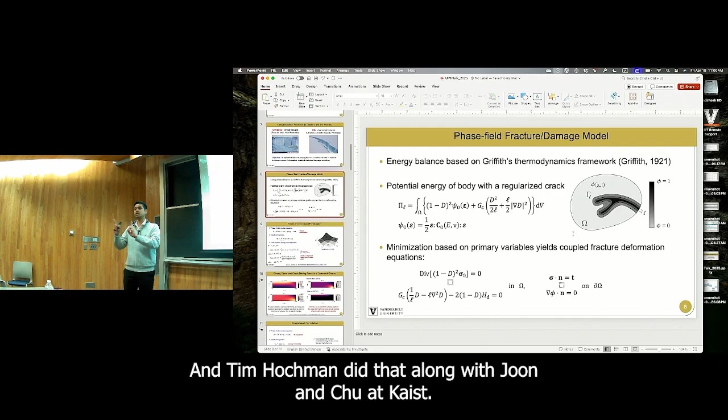And then in phase field, one of the difficulties is how do you define crack opening? That problem has been solved with a couple of papers. DeBorst and Tim Hochman did that along with Jinghan Chu at KAIST, and they use an integral to extract what the crack opening is, and then used it for hydraulic fracture. So you can do those, but these are recent advances.

And then you said the second part, activation or? The adaptivity, the machine, what criterion? Oh, adaptivity, yeah. So that's a very important point, right?

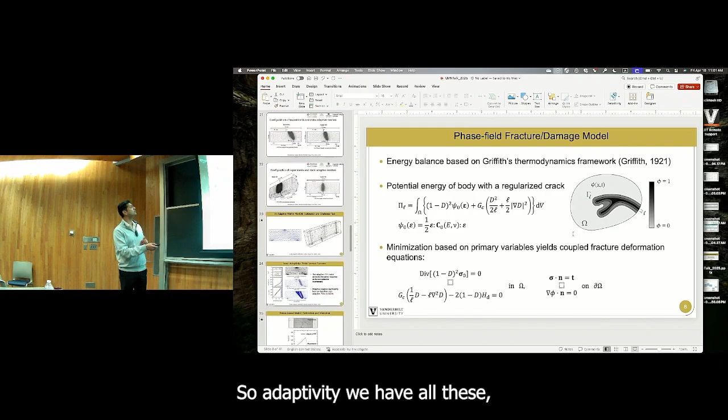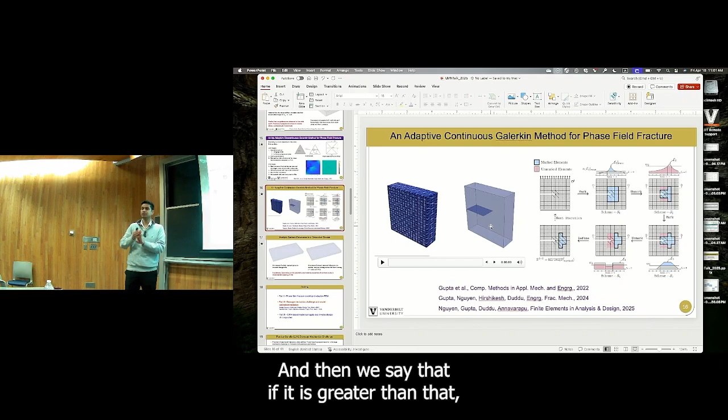So adaptivity, we have all these criterion here that I show. For each of that, there is an estimator and an indicator. So we take a certain value of the strain energy increment, normalize it with respect to the strain energy release rate, critical strain energy release rate. Then we choose a number between 0 and 1, and then we say that if it is greater than that, then we divide the element.

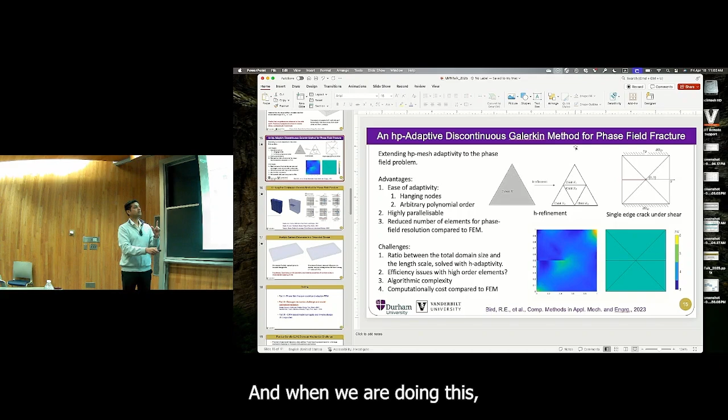And when we are dividing the element, we will only do it with one H refinement. That means in every case, you have a triangle, you make it into either 4 like that or 2, right? So we either half the mesh size or divide it into 4 smaller triangles. And when we are doing this, I'll play this one here. So if you see here, always the yellow is next to a green, the blue is next to a green, right? And what that means is that neighboring elements can only have one order of polynomial degree difference. That means 6 must be surrounded by 5 order, 4 must be surrounded by 5 order, and so forth. Or maybe I misspoke, the 5 is the green, 6 is yellow, right? So I said it the other way.

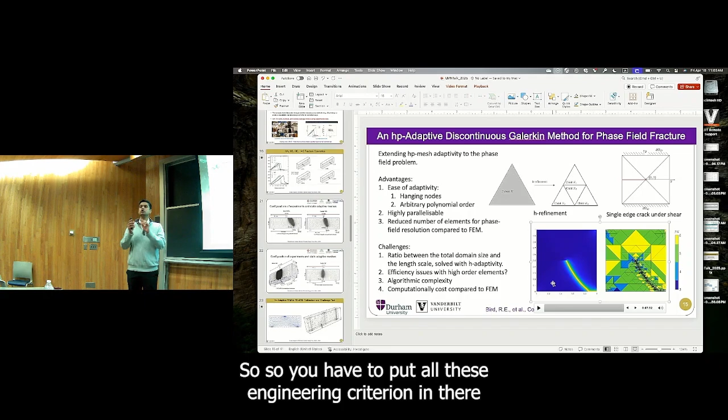So you have to put all these engineering criterion in there to make these work. So there's a lot of trial and error. It's more of an art than solid criterion. Yeah, thank you.

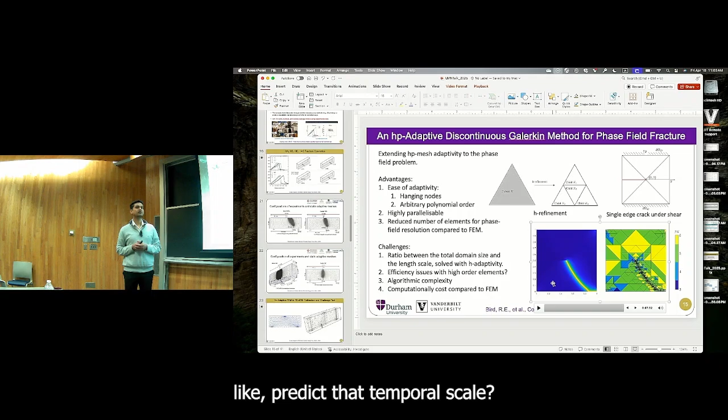Thanks. Just a really quick question. I know very little about glaciers calving, but what's the temporal scale? And I'm wondering how well do your models predict that temporal scale? Because I imagine that matters a lot as well if you're trying to predict when this will happen.

So I'll quickly go to this. That's a very good question, actually. That's one of the things that models don't do very well, because if you do linear elastic fracture mechanics, there is no time, right? It's just a quasi-static process. And so in this case, if you see, there is 2.2 years here. That means from the time that the crack initiated, there's already a big crack, but then it took 2 years to go from that initial crack to the full crack.

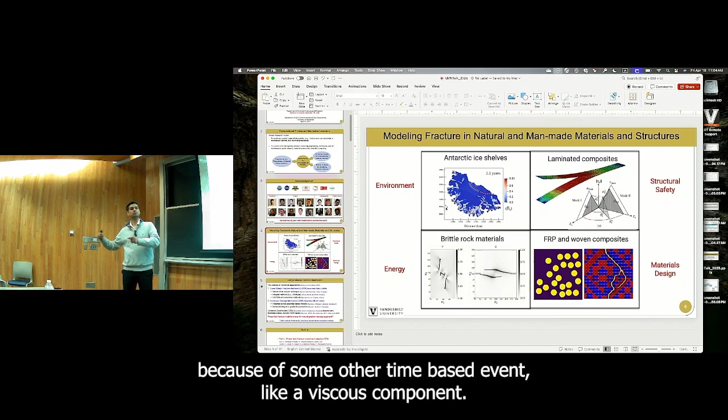When we do modeling, what we do is we assume that every crack propagation is quasi-static, but then the driving force is changing because of some other time-based event, like a viscous component. And so we are able to calibrate some viscosity and contributions that match this time very well. But it's still calibration. We are not able to predict time. Yeah, very good question. Thank you.

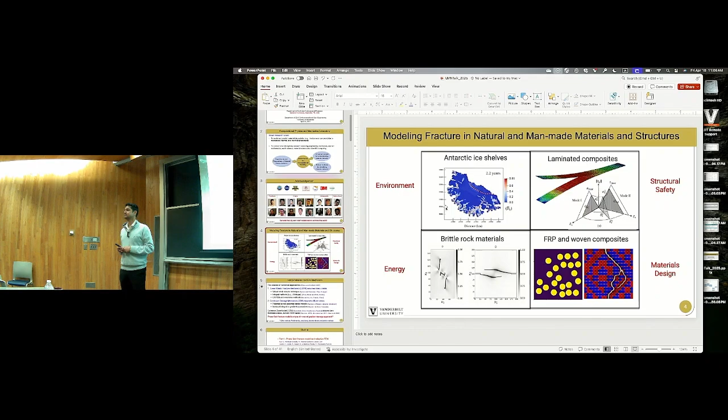Any more questions? Yes. I have a question about the inverse modeling part. You mentioned you use differentiable programming. I'm wondering how, kind of, do you use auto differentiation or an adjoint method here to do the optimization?

Yeah, so the question is about how do we get this whole thing as a differentiable system, right? So the simplest thing is that if you are able to define a forward problem in PyTorch, it automatically does the back propagation and gives you the auto differentiation gradients. So the whole point in the code is how do you define this forward problem?

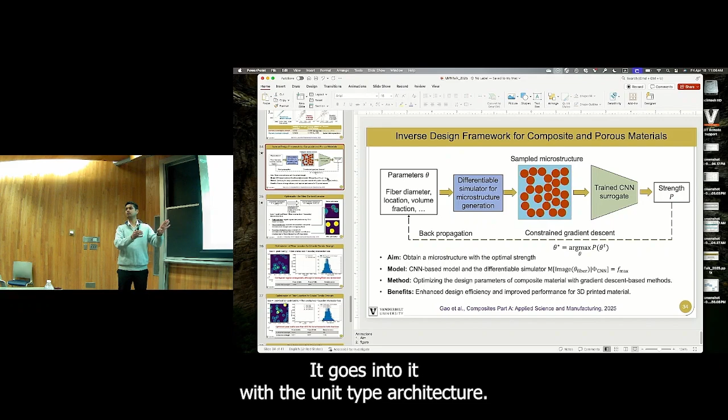This one is a CNN, so it was easy. You give it an image. The way the image is, you take the image, you make it 512 by 512 pixels, right? It goes into it with a U-net type architecture, and so it's going from a high resolution, low channel to a multi-channel, low resolution data. And then it's getting fed in, and you train it on the strength. So this part, once you define the forward problem, you get the auto differentiation based back propagation.

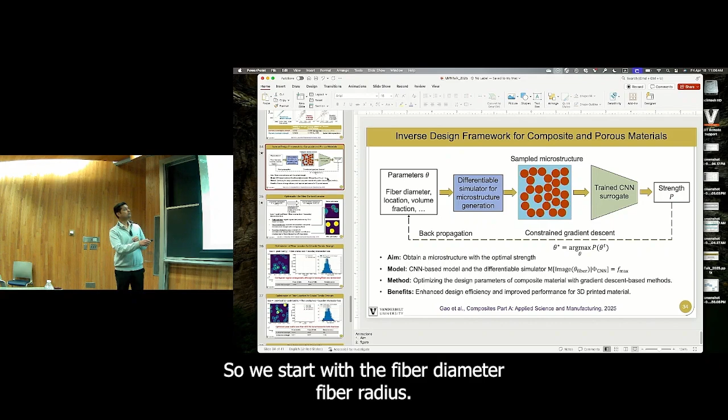The thing is, how do you generate these images in a way that is also differentiable? So we start with the fiber diameter, fiber radius, and then we use level set functions along with sigmoid functions, which are differentiable, and convert it to an image. So you're basically taking a sigmoid function which says it's 1 if it's inside the fiber, 0 outside the fiber. For each fiber, you're superposing them, and then you get this function that defines this image as a differentiable thing. You give the forward problem, the auto differentiation gives you the backward. So that's how it's implemented.

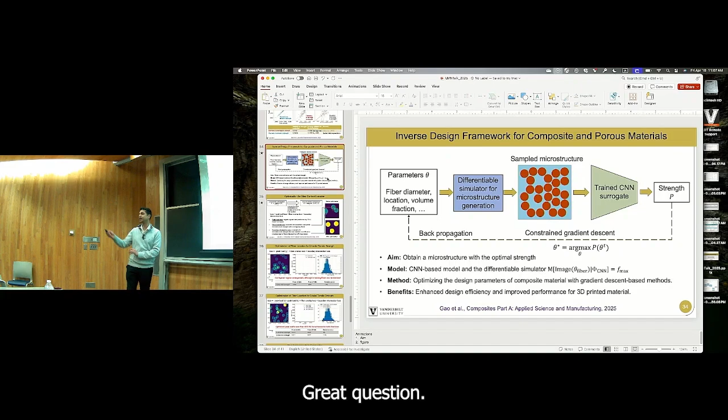Thank you, great question. We struggled with that initially, and then we said, okay, why don't we use sigmoids? Because if it's a step function, it's very hard for it to do the gradients.